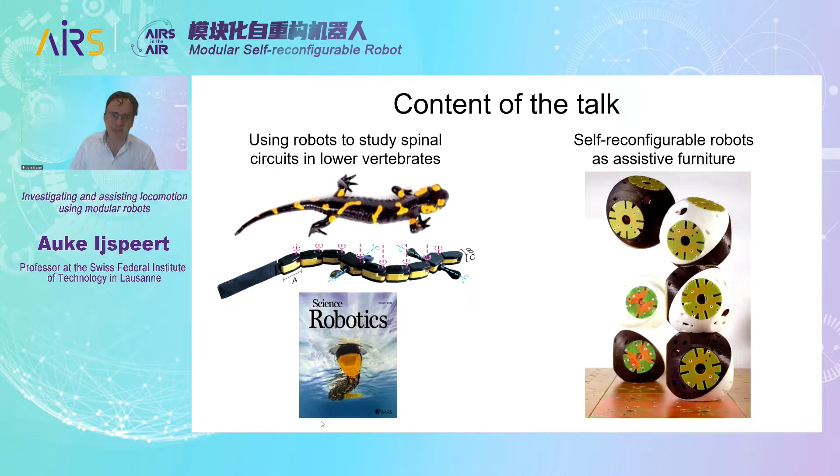My field of research is biorobotics, this very exciting field where people use all kinds of animal-like robots - legged robots, flying robots, or swimming or crawling robots. This is a sub-part of robotics, but super exciting because of these nice interlinks between biology and robotics, which is also there with the concept of self-reconfigurable robotics. It's this intersection between biology and robotics.

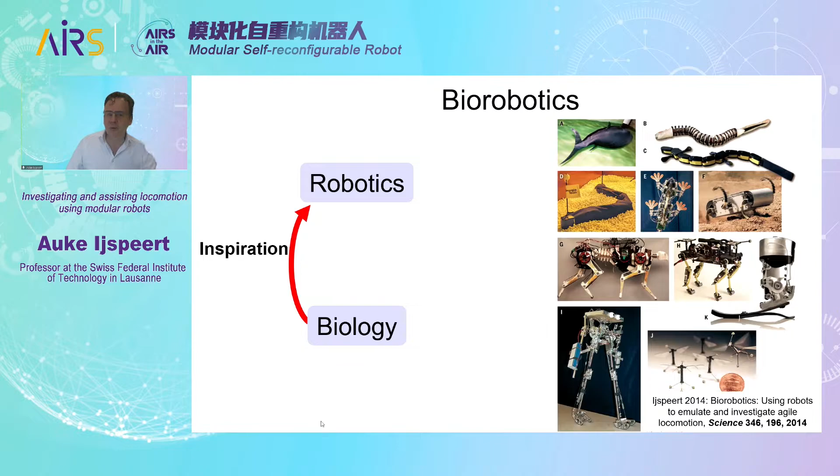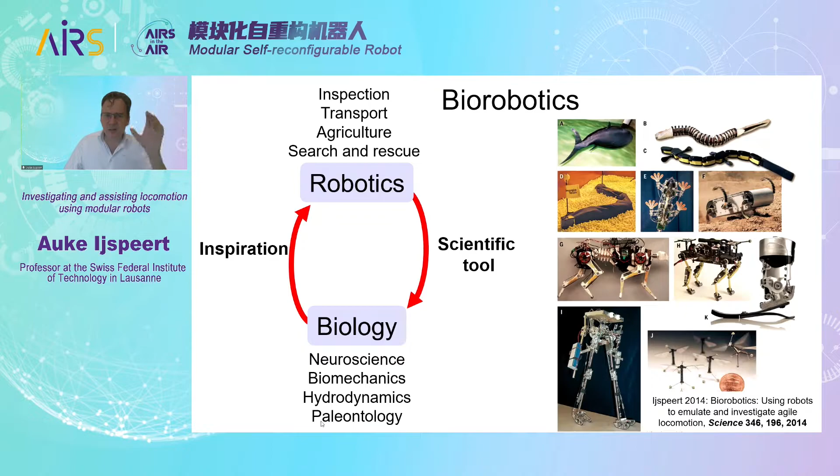One thing I like a lot is this bidirectional interaction between robotics and biology - the fact that you can use biology as a source of inspiration to make robots for outdoors, mainly for inspection, transport, agriculture, or search and rescue. But one thing I like a lot as well is this feedback loop, how a robot can be used as a physical model to test hypotheses about biology. Here on the right, I wrote a review paper that explores all these very nice research projects which have done exactly that. A robot can be an amazing tool to study neuroscience, biomechanics, hydrodynamics, even paleontology. I like this use of robots as a scientific tool.

So the first part of my talk will cover how modular robots can be used to understand and explore questions about neuroscience.

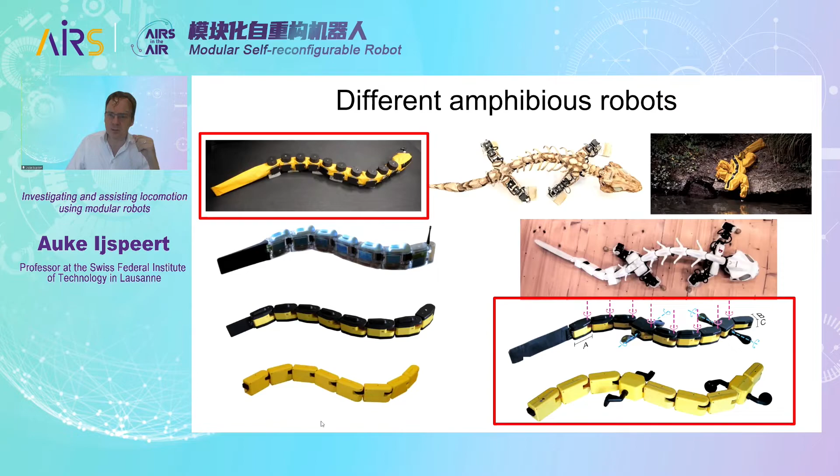To do that in my lab, we have developed over the last 20 years several amphibious-like robots that are indeed very modular. They all usually use the same type of modules or subset of modules, and their interesting part is that they're amphibious, so they can swim and crawl or walk outside. Today I'd like to present Salamandra robotica that we use to study the salamander, and a very new robot, AgnathaX, that we use to study lamprey or eel-like locomotion. So let me start by motivating why we do this.

We are very interested in understanding how the biomechanics together with the nervous system interact to produce this beautiful locomotion. This dog's nervous system is solving a very complex control problem. It has to coordinate more or less 200 muscles in a very good way to not fall. This is a very complex problem because it's highly dimensional, highly nonlinear, and hybrid with changing contacts over time.

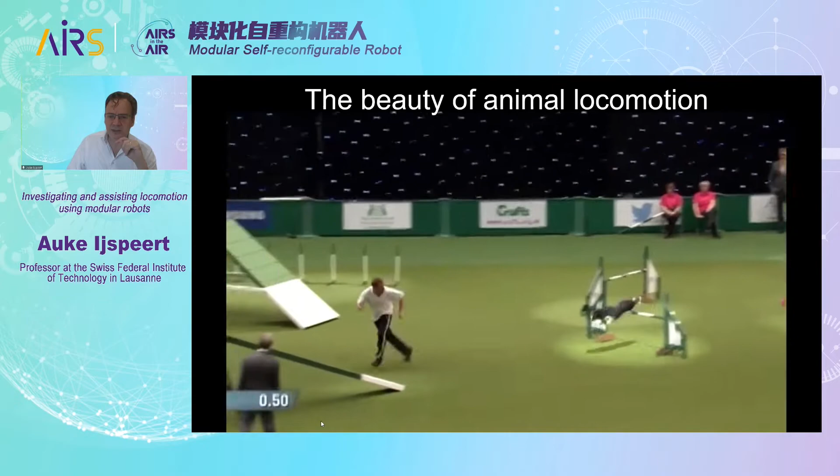And it's impressive how well it does. Animals rarely fall, even we as humans rarely fall. And even more impressively, these agility competitions you may have seen, where dogs have to get scores trying to pass a parkour as fast as possible without mistakes, show how multiple types of sensory inputs from vision and the vestibular system all play together to achieve very high agility. I think in robotics we're making very good progress, and Boston Dynamics is doing amazingly well, but we're still not at this level of agility that animals have, which I find very impressive.

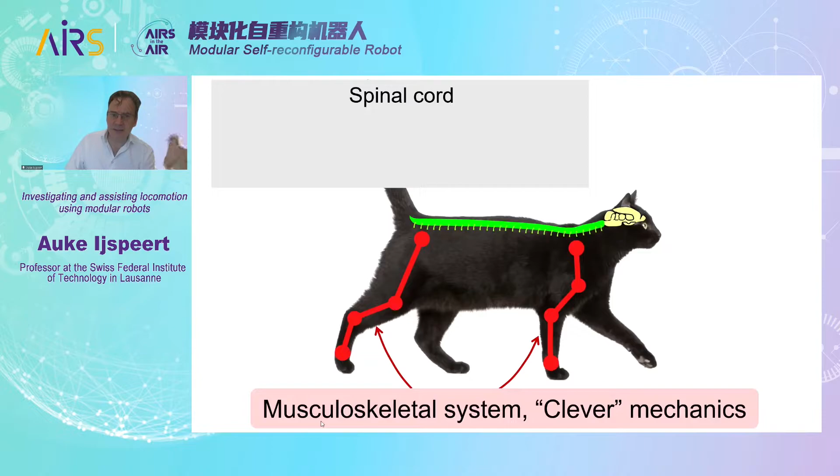Now, at the first level of abstraction, there are I think 4 main ingredients behind this beautiful locomotion. First is the musculoskeletal system. The biomechanics itself is, I think, very well designed to do already locomotion. And then the spinal cord is amazing. The spinal cord in vertebrate animals has, as you know, multiple reflexes - very fast feedback loops to stabilize locomotion.

And also something you might not know, it also has neural oscillators - local populations of neurons that can oscillate, distributed all over the spinal cord to control the different degrees of freedom. I see these central pattern generators, which I will call CPGs, a bit like feed-forward controllers to produce good patterns for locomotion.

A big question we have these days in my lab is to see this beautiful interaction between reflexes and central pattern generators in the spinal cord. One of my goals today is to show a bit how we model them, but also to convince you that these can be very good building blocks for controllers - locomotion controllers for self-reconfigurable robots.

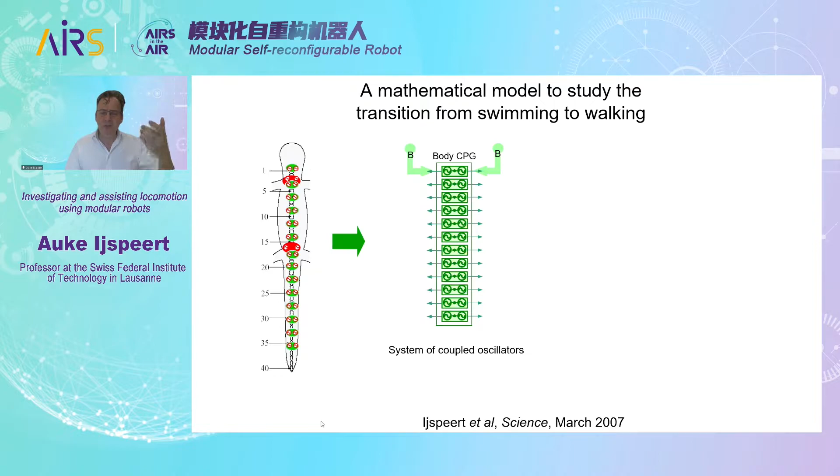With colleagues in neuroscience, for many years we have tried to model these circuits by starting with swimming circuits, as you find in eels or lamprey, and exploring how you should extend this kind of swimming circuits to add walking on top of swimming. We are able to test several control architectures, based on the circuitry of the animal, to explain how the animal could switch from walking to swimming.

Especially fascinating is that in the salamander, if you electrically stimulate the descending pathways at a low level of stimulation, you induce walking. If you stimulate a bit more, the walking frequency increases. And at some point it switches automatically to swimming. So just changing the global stimulation applied to the network makes a global change of locomotion between walking and swimming.

So we made several types of models, but the most abstract models, which are also very good as controllers for robots, are just coupled nonlinear oscillators. With two state variables, one for the phase, one for the amplitude, they are coupled together to produce locomotion patterns. They are very abstract, but still representative models of the neural circuits that we know exist in the real salamander.

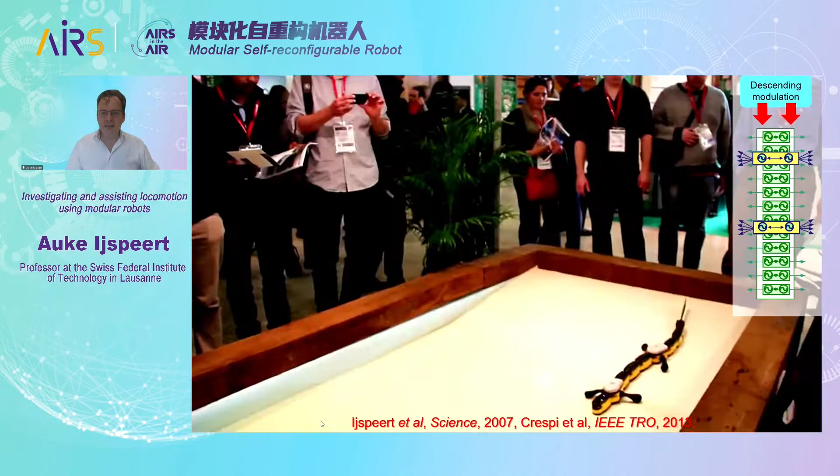Okay, so let's look at how this works on the robot. Let me show you here the swimming and the walking behavior of the animal. What's interesting here is by playing with just two descending signals, the red signals, we can modulate both the speed and the heading and the type of gait.

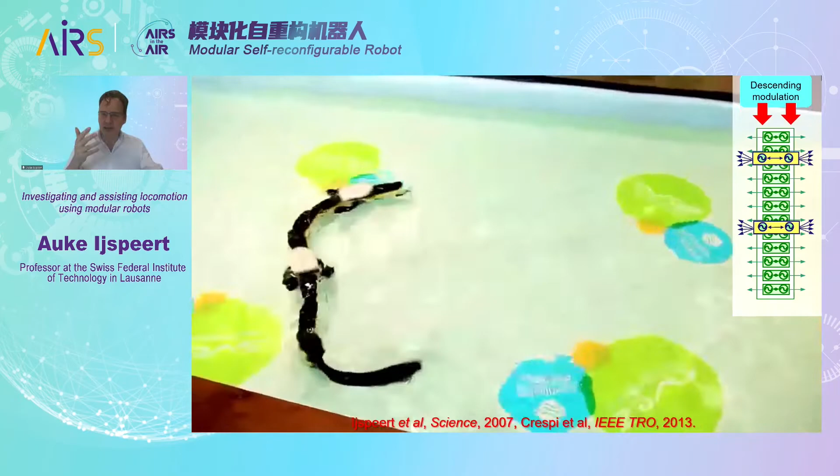If we give a low level of stimulation, as you see here, we have the walking gait. And if we give a high level of stimulation, as we do now with a remote controller, it switches to swimming. And we can even control the direction by just stimulating more one side than the other.

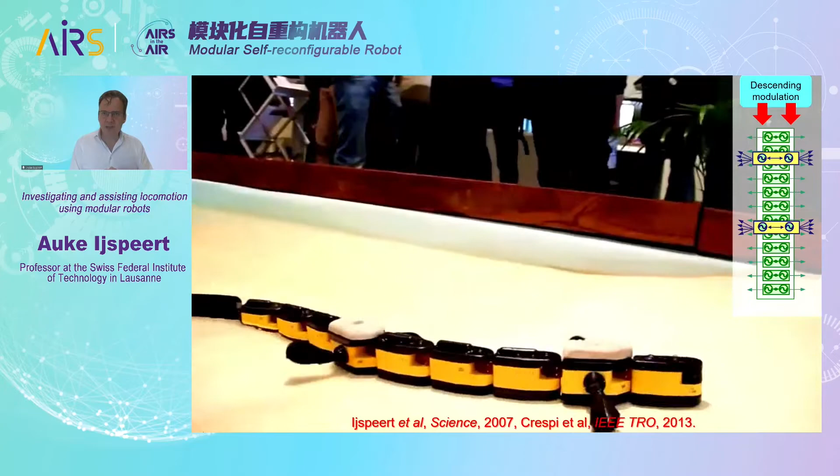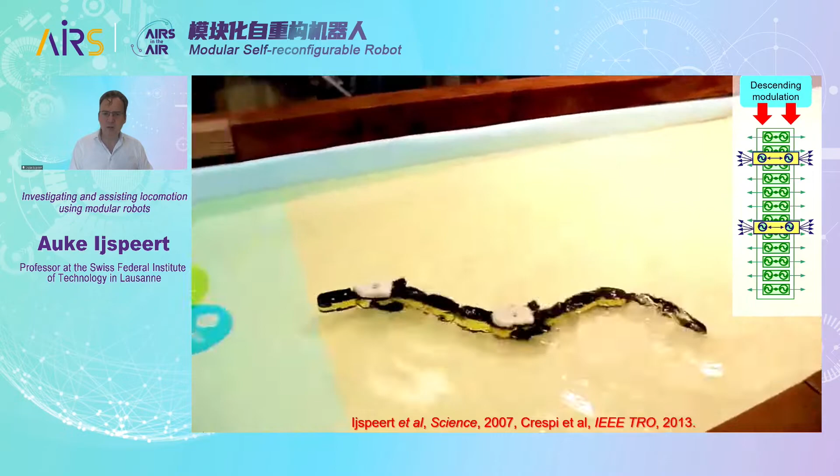I think this is the beauty of the spinal cord: it only needs very simple descending pathways, like these strings on the puppet, and then it's the spinal cord, the CPG in this case, that's completely in charge of modulating all the locomotion signals. I think this is beautiful from a neuroscience point of view. It's also super interesting for robotics, because if you manage to have these low-level, robust locomotion controllers, you can have very good locomotion control based on CPGs.

To summarize, in this case we demonstrated that central pattern generators can modulate speed, heading, and type of gait under the modulation of a very few drive signals.

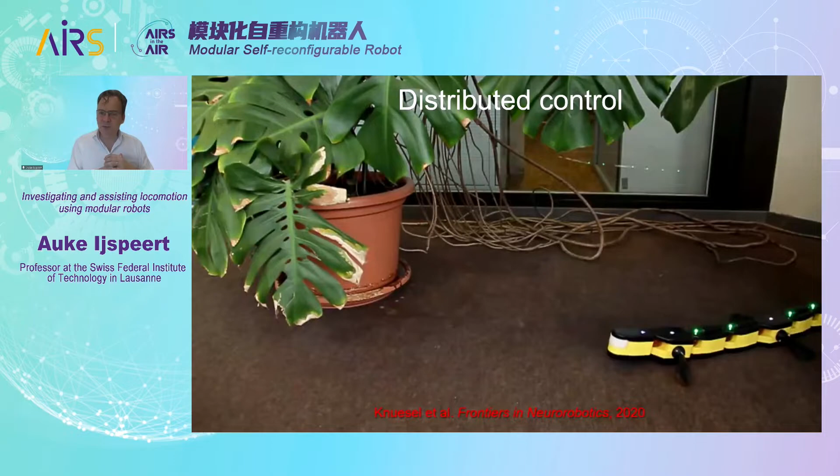Also possibly interesting for reconfigurable robotics: if we just unscrew some connectors here, we can have the robot splitting into different parts, because we are able to really implement these controllers in a distributed way. Every module has a microcontroller, every module has a battery, and they communicate with the CAN bus. But if we separate them, we can still locomote because of this distributed implementation.

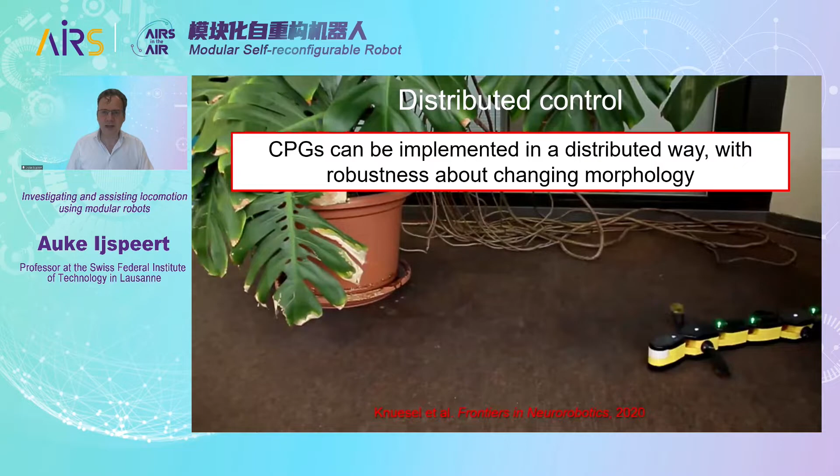Okay, I'll come back to that when I present the Roombots, because we do exactly the same on the Roombots.

Now, a big question in neuroscience is how locomotion is generated in animals. People in neuroscience have proposed two main concepts: one is that locomotion should be seen as a chain of reflexes, where sensory feedback is key to generate rhythms. The other is that locomotion is based on central pattern generators, the oscillators, which is a more feed-forward view of locomotion.

There's a very nice review paper by Art Kuo that systematically explores the optimal way of combining sensory-driven versus CPG-driven locomotion, and he nicely showed that combining them is optimal.

But this is still an old debate that started in neuroscience with Sherrington and Graham Brown. It's also a debate between whether the peripheral nervous system, the sensory signals, or the central nervous system, which has the neural oscillators, is more important. And there's also the question of feedback control versus feed-forward control, which we know is important in robotics.

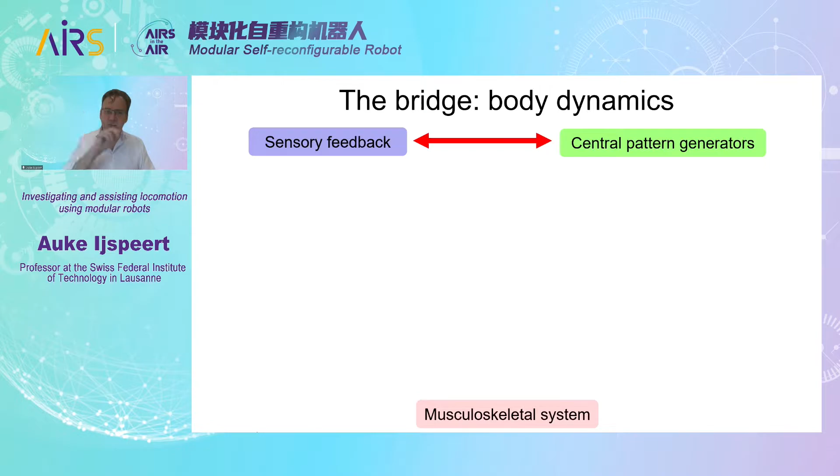So the interaction between sensory feedback and central pattern generators is obviously the body. And here robotics can be very important to show how a well-designed body can do locomotion. The most extreme case of a well-designed body is a passive walker, a mechanical system with no actuator, no sensing, no computation, that can just walk down a ramp with gravity providing energy. That demonstrates that a well-designed body can, in principle, do locomotion.

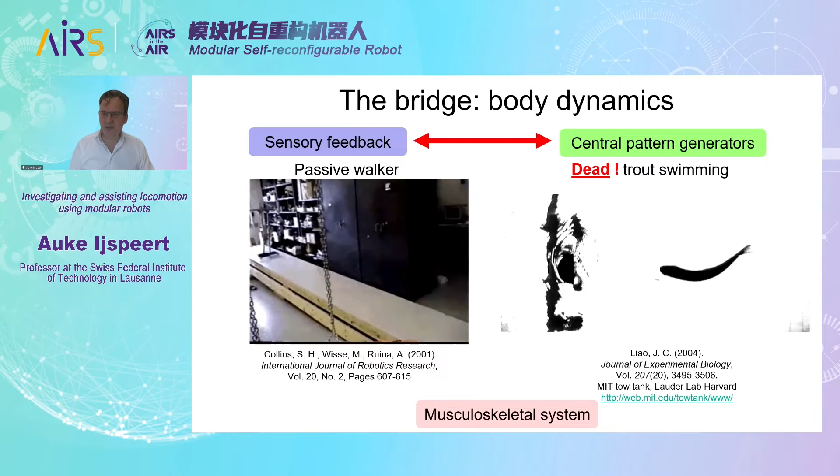In a similar way, fish can swim very well thanks to very good body properties. Here you see a trout swimming in a street of vortices. You don't see the vortices, but there are vortices in the water, and the trout can benefit from this. This is so extreme that in this case it's actually a dead trout—just the biomechanics of a dead fish can benefit from the flow to swim forward, showing it has very interesting viscoelastic properties.

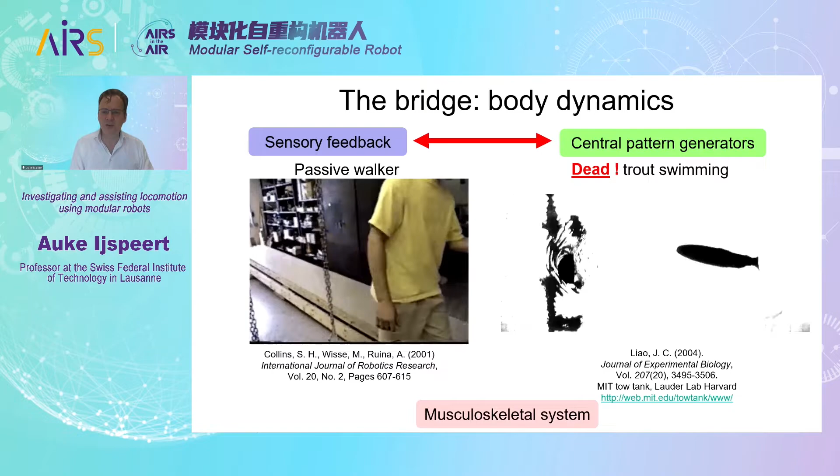Now we very much want to explore how this interaction between sensory feedback and CPGs happens. So we went back to lampreys and eels, because eels are very impressive fish—they are super robust against spinal cord lesion. If you cut the spinal cord in one place or another, removing coupling between the neural oscillators, the eel can still swim almost identically to intact swimming. That means there must be some mechanism below the lesion that keeps the rhythm active and coordinated with the rest of the body, and that must be sensory feedback—sensory driven, since that's the only information available locally, as the descending pathways are completely cut.

So for several years we've looked at the role of sensory feedback in swimming. One thing we immediately knew is that sensory feedback is important to handle perturbations. For instance, with a speed barrier, if there's no sensory feedback—open loop—you are pushed away and cannot cross this perturbation. But in the lamprey, an eel-like fish, we know there are local stretch receptors. If you feed these back into the local circuitry, it acts as a stiffening mechanism that allows crossing the perturbation. So that's the first reason to have sensory feedback: to help handle perturbations.

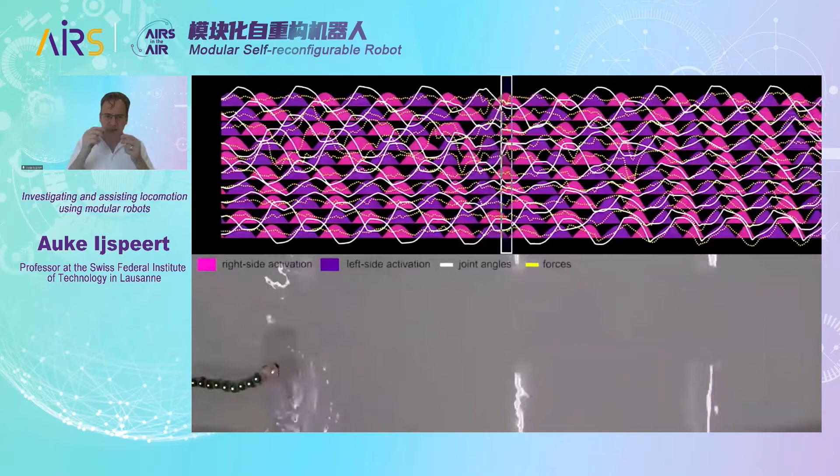And this works also very well on the robot, as you'll see now. It takes a bit more time to stabilize, but here you should imagine all these oscillators start with random initial conditions. They feel the local pressure little by little through the embodiment and through the fluid providing information. You see a beautiful traveling wave emerging. And it's really close to the optimal speed you can have. So it systematically converges to a good forward traveling wave.

And the fact that we go forward, that's asymmetric, is due to the asymmetry of the body. The fact that we have a passive tail at the end breaks the symmetry and makes this swim forward, as you see here.

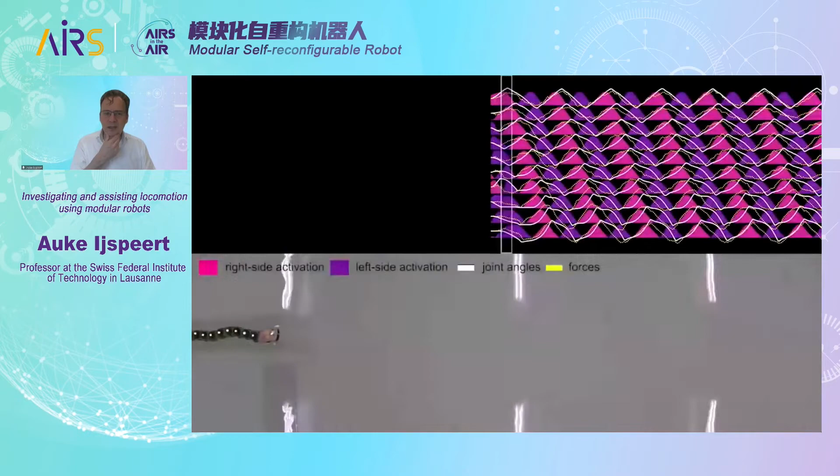Obviously, the animal has everything combined. So if you combine the oscillators and the feedback, you have even better swimming. Here what you'll see is the transients are shorter, and very rapidly now it goes to very nice swimming. So everything together is better than only the oscillators or only the feedback.

And especially what's beautiful is once you are combined, you become very robust against lesions. I don't have time to go in details, so I suggest you read the paper. But what we did is we systematically applied all kinds of perturbations to the network, like destroying sensors, destroying couplings, even killing some oscillators. And we mixed this perturbation with an increasing number of disruptions. And we simply looked at how speed decreases the more you disrupt the system.

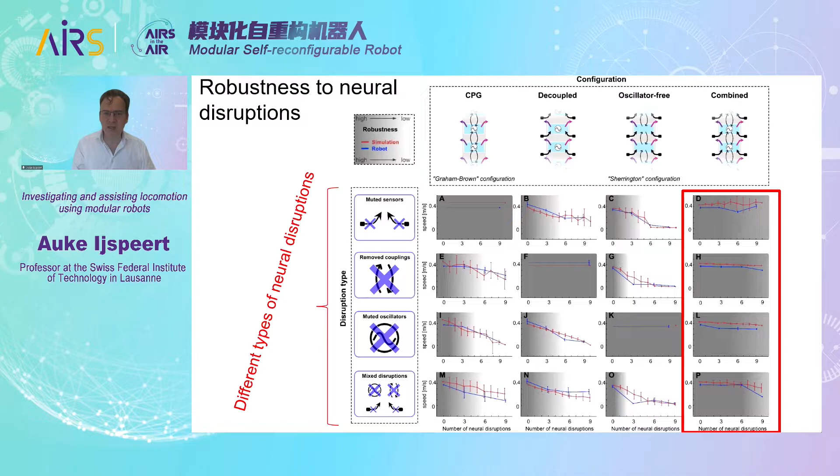And if it's dark gray, it's good. You keep a high speed, but if it's white, you don't have a good speed. And the combined circuit was always systematically much more robust against perturbations than any of the other controllers. So that basically explains why we have these redundant controllers. Each of them separately can do a good job, but together you become much more robust against lesions than any of these mechanisms alone.

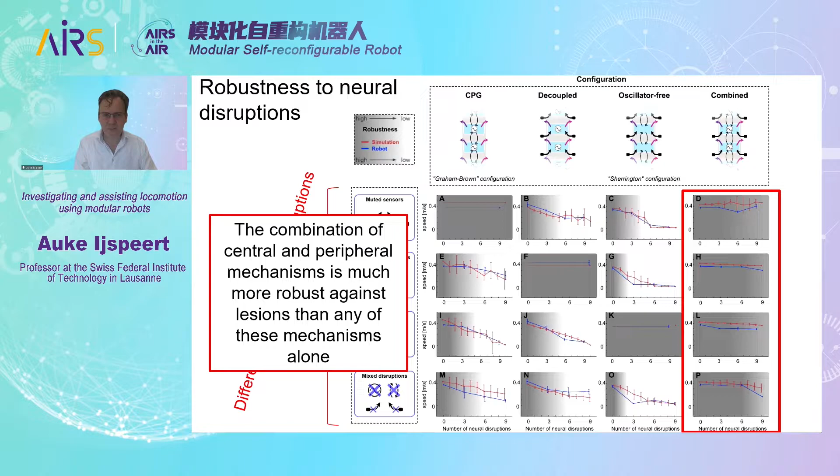That's probably the reason why we have this redundancy in the control system in swimming. Okay, so this concludes the neuroscience part. Basically, my take-home message is the spinal cord offers very sophisticated control circuits and a beautiful inspiration for robotics, with a few descending pathways activating very rich motor behavior. Very good redundancy between CPG-driven locomotion and sensory-driven locomotion, which is, I think, we should always see locomotion as a self-organizing mechanism, very robust.

We have this hypothesis that the respective roles have changed during evolution. And finally, as we'll see next, we really like this concept of CPG-based controllers, or spinal cord-inspired controllers, because it's very robust, it can be implemented in a distributed way, and it's very fault tolerant.

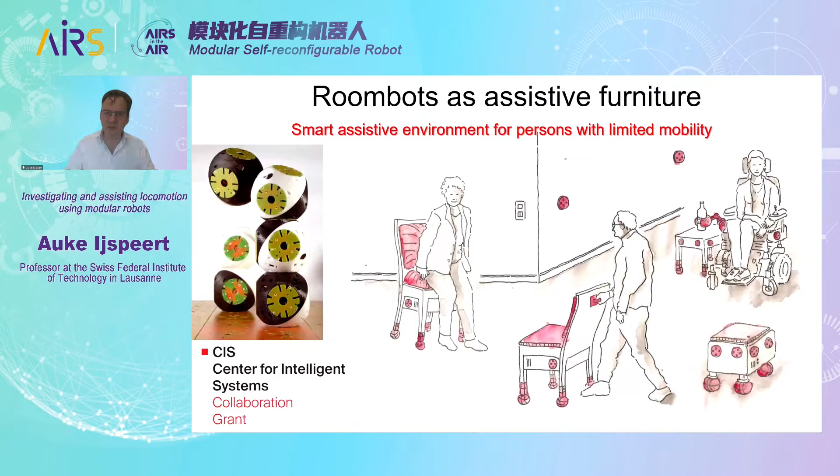Okay, so that's it. Let me now switch rapidly to self-reconfigurable robotics. I see I'm a bit over time, so I'll go a bit faster. But here the idea is to see how the concept of modular robotics can be useful for assisting people with limited mobility. I've been a big fan of self-reconfigurable robots for many years, so I always followed it with big interest.

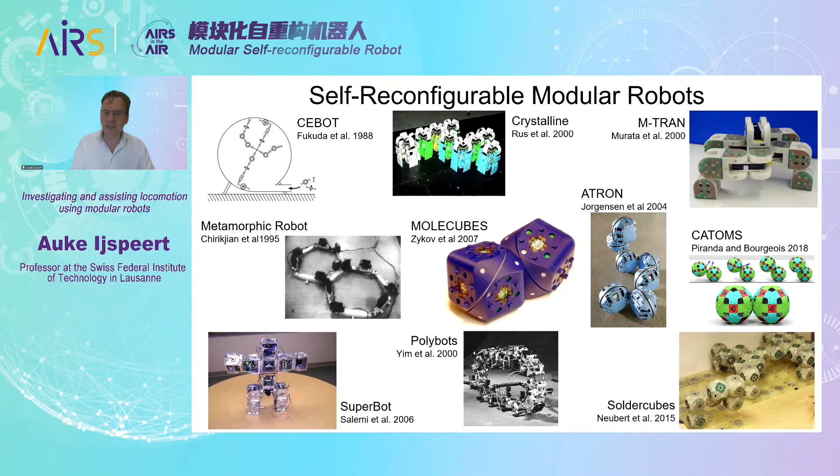We took inspiration from this to make what we call the Roombots, which are self-reconfigurable modules that can attach and detach to the ground. We wanted to see how we can use them for different things, but in particular to create furniture. Because we want to use furniture or the environment to assist people who have lost mobility. That's why we call it Roombots, because they are to be used in rooms and make assistive rooms.

So we wanted to design the Roombots, first of all, as a framework to explore locomotion learning with arbitrary morphologies. We also like the topic of self-reconfiguration. And finally, we want to make something useful - this assistive furniture and assistive environments.

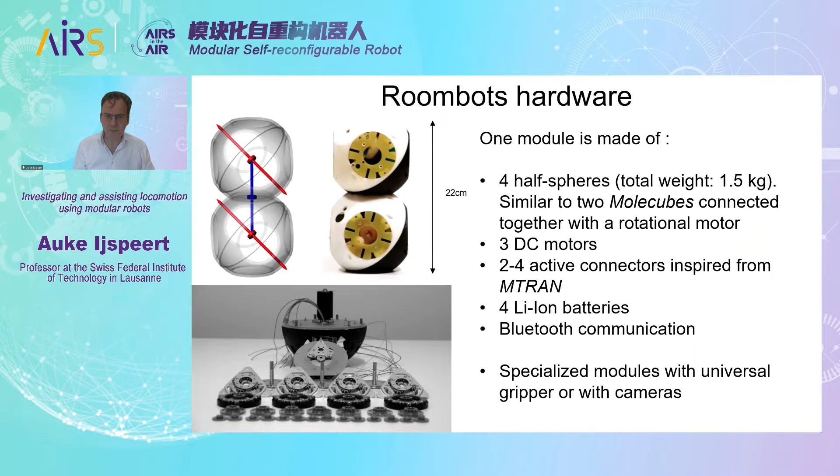The Roombots hardware, this is one module - what you see here is about 22 centimeters, more or less 1.5 kilos heavy. We took strong inspiration from the Molecubes from Zykov and Lipson, but we connected them together and added 1 degree of freedom to allow rotation between the two. We also have connectors inspired by one of the versions of the M-TRAN for connecting things together, and we have distributed electronics, but I'll skip this a bit.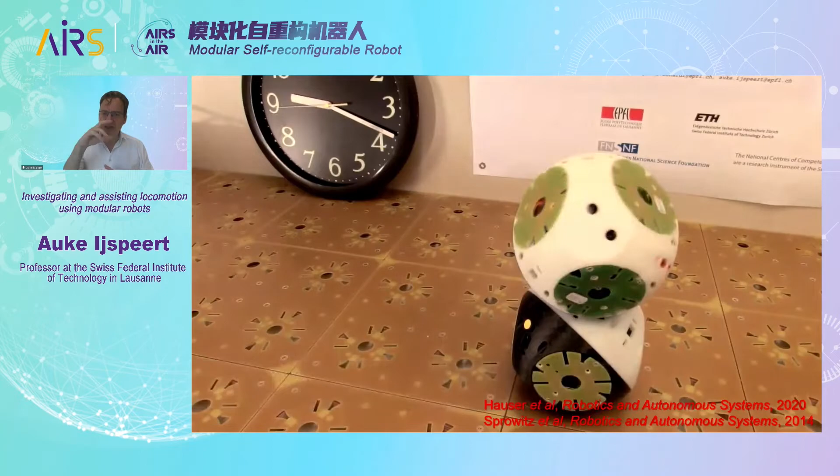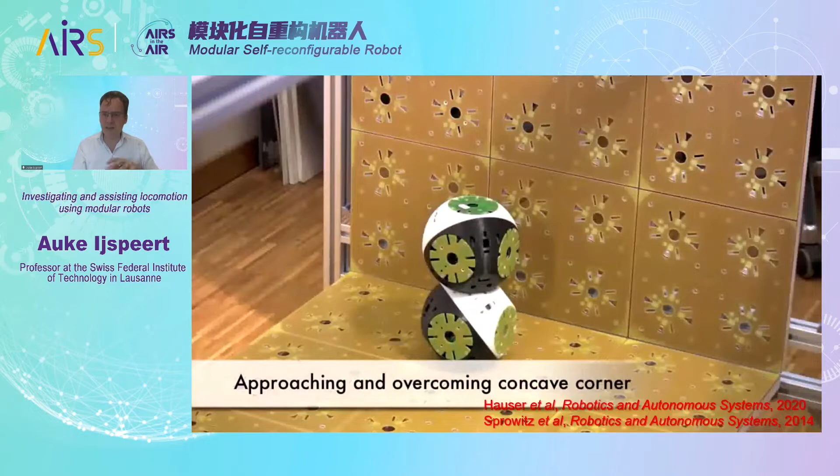Let me show you how this works. This is one Roombots module. You see the 3 degrees of freedom actuated, with diagonal axes of rotation. Thanks to this, we have quite some space of movement we can create between these 4 half spheres. This is the dynamic connector, inspired from one of the M-TRANs. With this, we can connect to the grid, to the ground, and to neighbors. That starts to open all these beautiful options that self-reconfigurable robotics offers - creating building blocks that can move by themselves, that can attach to each other, and that have very interesting properties.

I'm very happy that our modules can do what we call on-grid locomotion. A single module can move around on the floor, on the wall, and even up to the ceiling. That's kind of interesting - if you are in the grid, you don't need others to move around. A single module can have these locomotion abilities.

So what did we do with this? As mentioned, one thing we did is to study locomotion, a bit like animal locomotion. There's a direct link to what I presented on the salamander and the lamprey, in the sense that on the Roombots as well, we can locally program the local oscillators. They communicate via Bluetooth to create coupling, and then we can run an optimization algorithm to find the optimal shape of the parameters of the CPG to produce patterns of locomotion.

We can do that while we locomote, using different types of algorithms. In this case, it's a particle swarm optimization, running on board of the robot. Within half an hour, because the search space isn't that big, we can get very interesting gaits and adapt to different types of morphologies by doing this CPG tuning.

So here I really think that CPGs become very good building blocks, because they naturally produce oscillations, and they're a very good substrate for learning. At the end, interestingly, we got a gait that's quite similar to the salamander gait in this particular case.

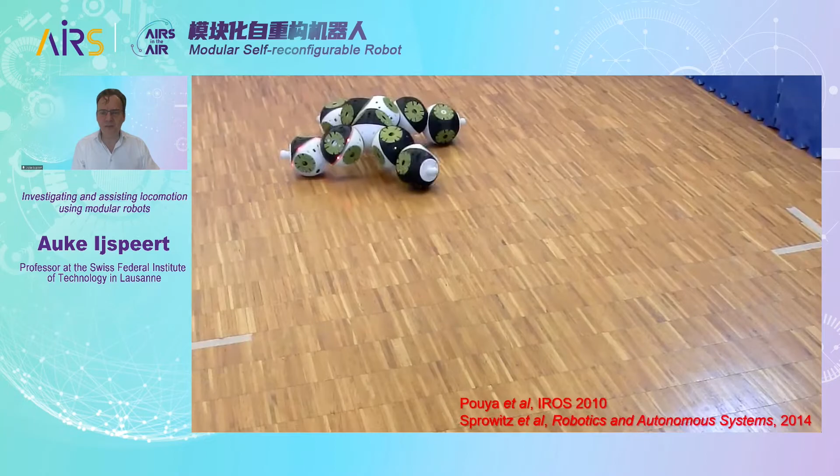Here's an example with real hardware, a slightly different morphology, where we learned this online, and you see that you also get interesting gaits moving with the real hardware.

And here I like the notion of using optimization to explore the space of gaits, because you might generate gaits that you would not design as an engineer. Like some of these rotations go beyond 360 degrees and makes a fun way of moving around with the hardware.

So that's what I call off-grid locomotion, when you do locomotion completely outside the grid of connections. Now we also want to do on-grid locomotion with self-reconfiguration.

And here, as you know, and other people are more expert than we are, but this is a very challenging task, because this is now really exploring a tree of possible options. You have this curse of dimensionality, the explosion of possible options. And it's a very big problem how to get 20 modules go from configuration A to configuration B.

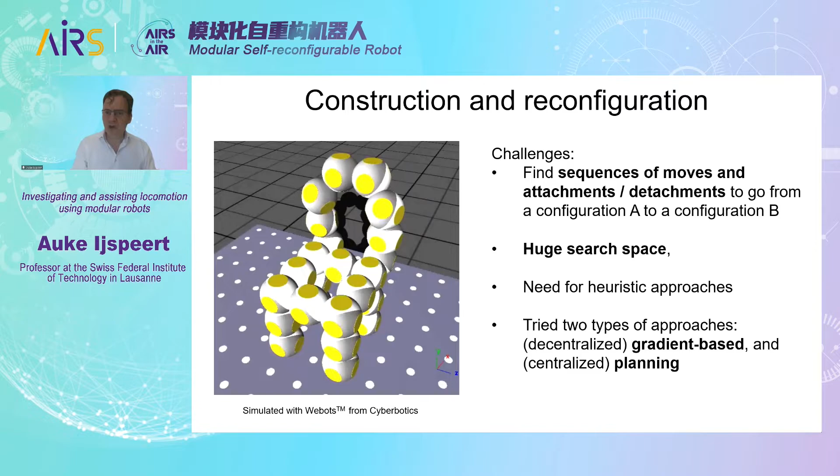And we do it in different ways, either in a decentralized way with gradient-based, but that can get stuck in local optima. Or with fewer modules, we can do it in a centralized way with more traditional planning. And I'll briefly explain this planning here.

So the idea is to reduce a bit the space of all possible movements to discrete actions with discrete angles. And then to really think into voxel, like a 3D voxel space. We don't allow any type of configuration. We stay in a voxel space to reduce the options of structures, but still with a very large range of things we can do.

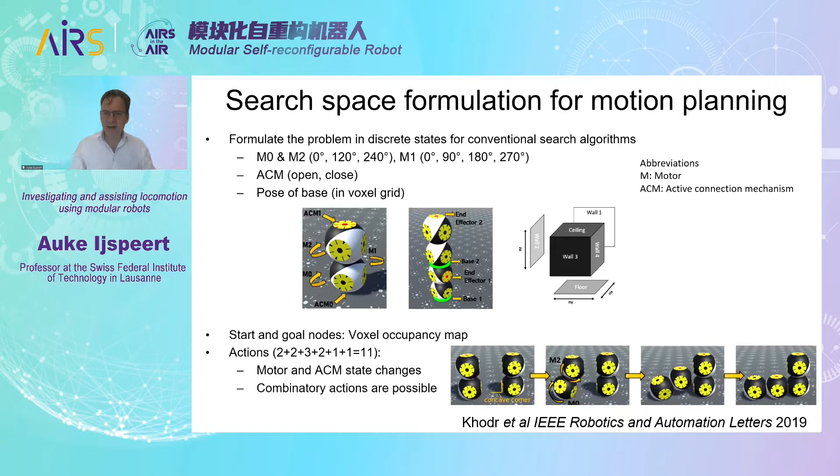Then, of course, to search faster, we need some tricks. When we have the tree of possible options, we prune the tree to remove things that are not interesting, like things that have collisions, things that try to break a kinematic chain, things that don't lead to a meaningful connection, or things that even lead to modules that would drop. So we prune this out.

But doing that, we can now do nice on-grid locomotion where we can, for instance, ask this module automatically by itself to find a way to cross this little barrier. So the search algorithm will find an optimal way of moving from here to the other place.

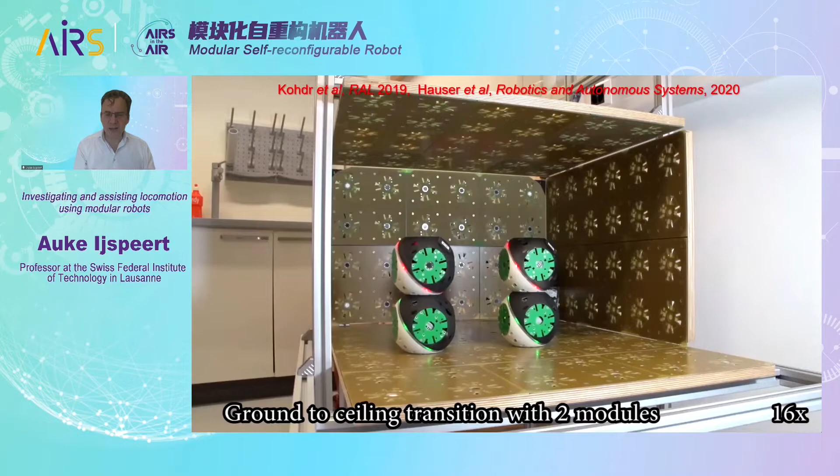Also, what's interesting is if you ask both modules to go to the ceiling, the search algorithm will discover that it's good to collaborate. Rather than each of them moving around the walls, it's a good idea to collaborate and help each other to go up there. And that's automatically found by the optimization algorithm.

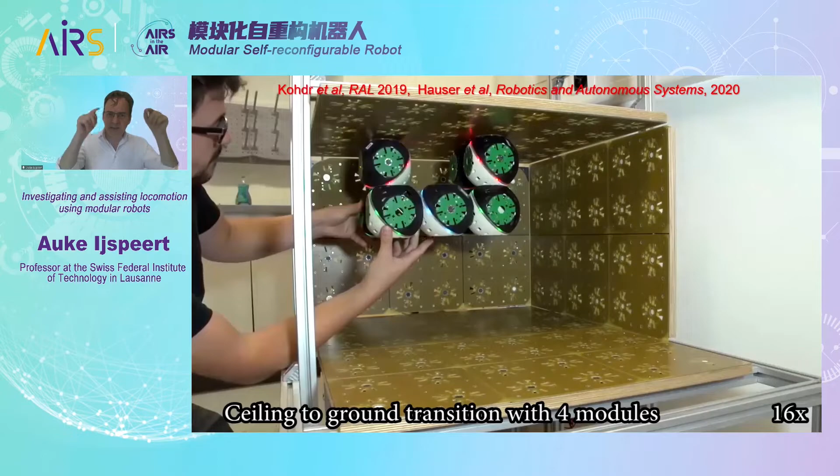Similar thing, if you ask the modules to go down, they will also discover that the fastest way of doing that is to collaborate, help each other. And then you can go down to a new configuration to the ground. So these are all things that emerge from the search space and the A-star algorithm that we use.

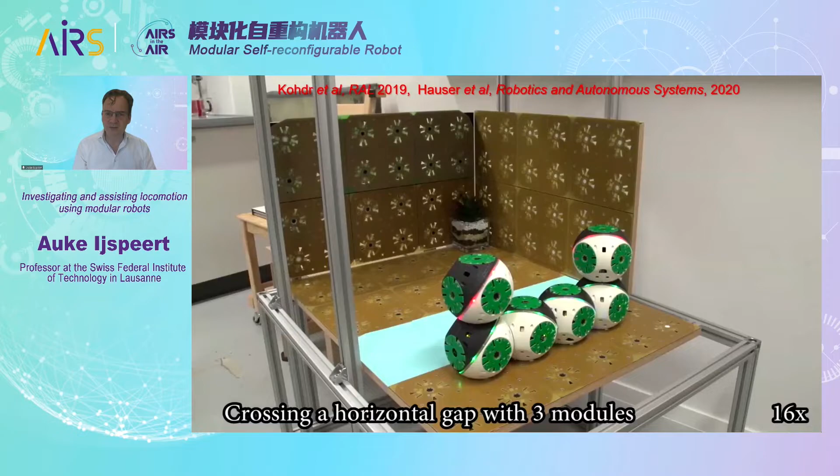And at the end here, this is an example where we have to cross a gap. And here you find also a bit like social insects that construct a bridge, like these ants that construct a bridge. The algorithm is finding a way of doing that.

Now, the most complex thing we did is to construct a chair automatically. We did it in 2 stages, so we had a mid configuration and then an end configuration. Otherwise, the search space was taking too long. But here you basically have we found a sequence to automatically construct a chair. So sometimes we have to help it a bit. By the way, the connector is not perfect, but this is a way of self-constructing furniture.

On my side, I love to construct my own furniture. I'm a fan of IKEA, but if you're lazy, you could just press a button and the furniture would construct itself. Now, very rapidly, because I'm close to ending, I think two more minutes.

Now I want to say how we start exploring the use of these modules for assistive furniture. And here the idea is to, little by little, embed help in the furniture or in the environment for people who have lost mobility. Like if you're in a wheelchair, it could be interesting to have the table bring something to you rather than having you go to a glass of water, for instance.

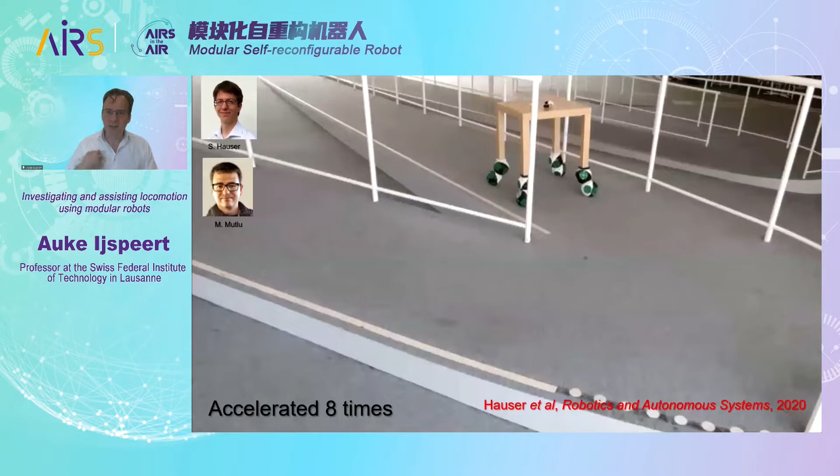And here what's interesting is that we can connect our Roombots module to existing furniture. So this is an IKEA table to which we give mobility, as you see here.

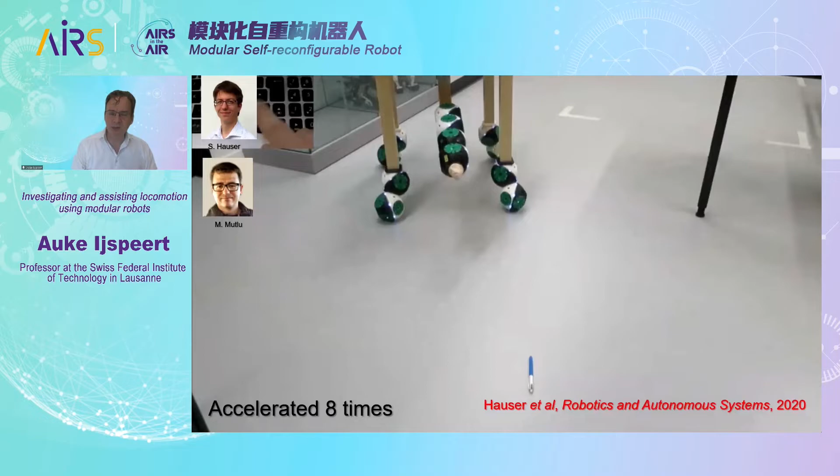And it can move, it's remote control, but it can adapt to slopes, it can adapt to steps. And it starts, therefore, to give interesting functionalities to a table. We also have a universal gripper. So now a table could bring a pen to somebody who is in a wheelchair, as opposed to having the person come and go towards it. And it can also do simple manipulation abilities from one to the other using the universal gripper.

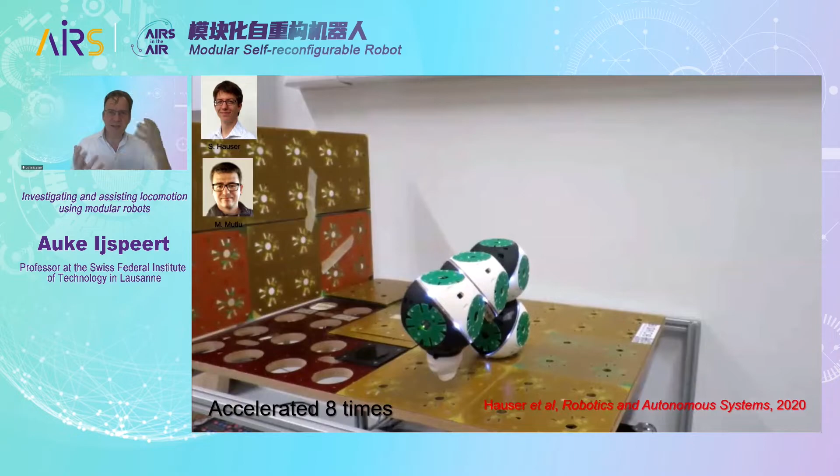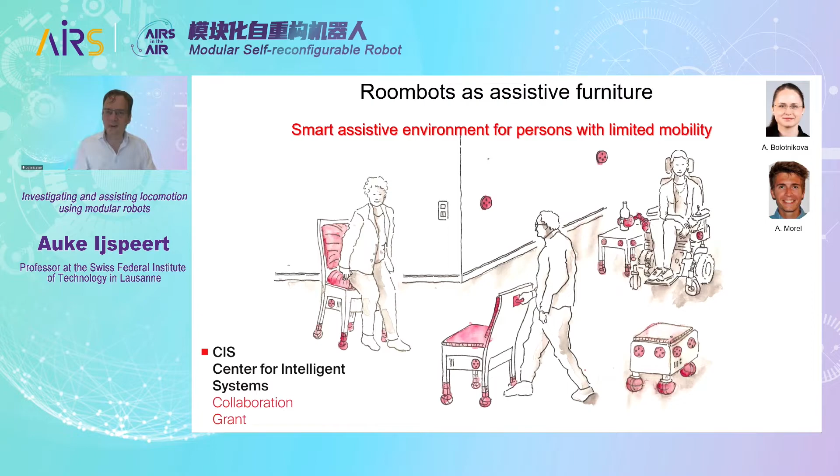So this is a bit the dream, to start exploring how we could embed all this technology in the environment, and indeed make sure that the furniture is there to help move out of the way when you cross the apartment in a wheelchair, and then comes back to help you, or also give stability for elderly. And then finally, I really want this to be fun technology, something that's not only interesting for assistance, but just fun to have functionalities and even to play games with kids. So that's a bit the dream for the Roombots.

And finally, I think the Roombots could also be applied to reconfigurable factories or conference rooms, or even in space, possibly. That could be alternative applications of the Roombots.

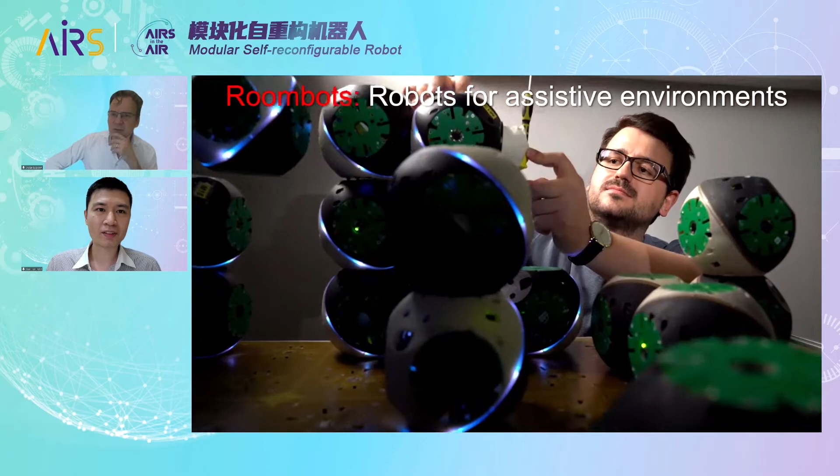Yeah, I think that's important. Actually, if you only use modular robots to build a chair or table, it's very difficult to make it useful, because it may not be rigid enough to hold something.

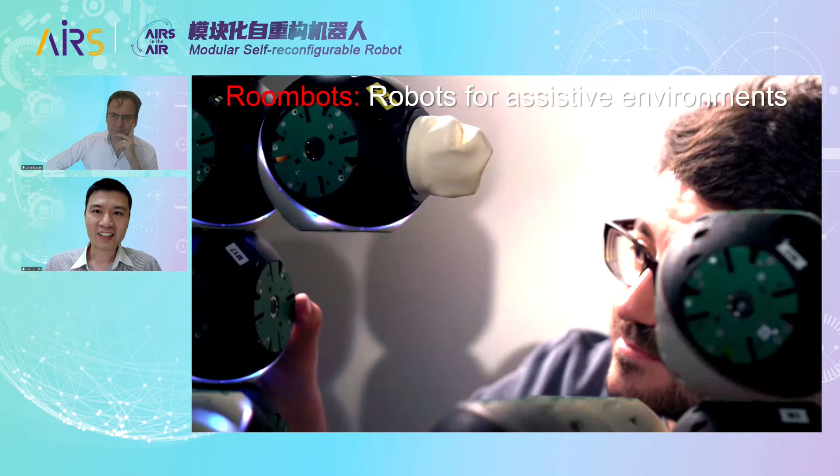Yeah. Okay, so it's time to have some questions. Is there any questions?

Hi, Professor. Thanks for your wonderful talk, which is very inspiring. And I'd like to ask a question. I think the working model of CPG does not look very complicated, but it is. I think it's very effective. And could you please explain the reason why, from a biological point of view?

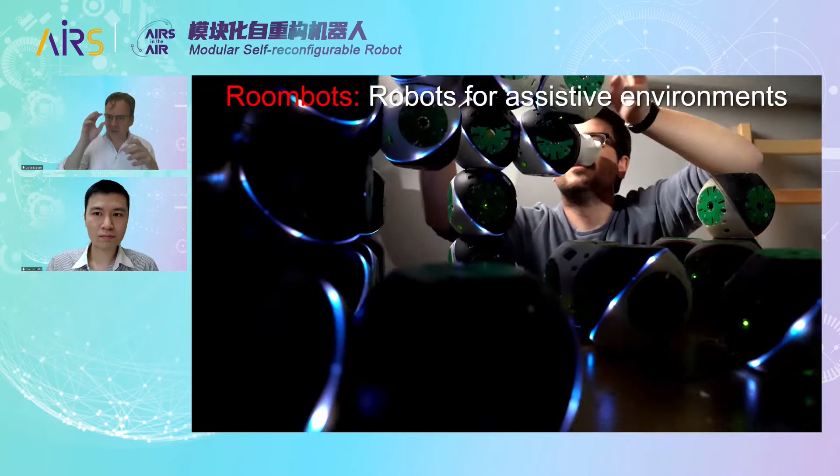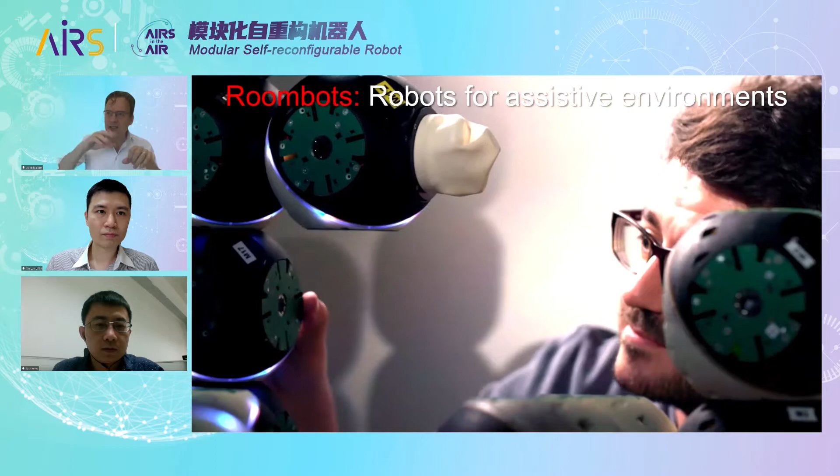Yes, so I think nature has evolved these oscillators as building blocks, and these are very good basis for locomotion. So indeed, once you have the oscillators, the main thing you then need to adjust to get locomotion is to adjust the coupling such that you have the right phase lag. For instance, sometimes you want anti-phase behavior, sometimes in-phase behavior. And then the phase lag is important, then the amplitude is important, and possibly the waveform, what exactly you're doing with the joints. But having these as building blocks, it's kind of normal that the learning then goes quite rapidly because you already have very good basis for doing locomotion. And I think both during learning and during development for different morphologies, that's what nature has done. It's just reorganized a bit these blocks, these very useful building blocks for behavior.

Okay, yeah, thanks, Prof. Yeah, thanks for the good question. Yeah.

All right, we have a question in the chat box. Hi Professor, I'm a freshman. I'd like to know which major's knowledge do you think is the most important? I think it means what's the important knowledge to make a modular robot or to generate central patterns, or also which educational program to follow possibly.

Yeah, I think that's a very good question because indeed I'm lucky that in the team we have people with very different backgrounds. Some are more computer science, which is very important for good software engineering, programming, and machine learning. Some are more control people, some are more mechanical, and some are from electronic background. So I think to make a good modular robot, self-reconfigurable robots, you need to mix all these skills. Interestingly, I was a physicist, so I was never trained as a roboticist. I became a roboticist later, so even if you don't do robotics, there's still hope for you to do robotics later.

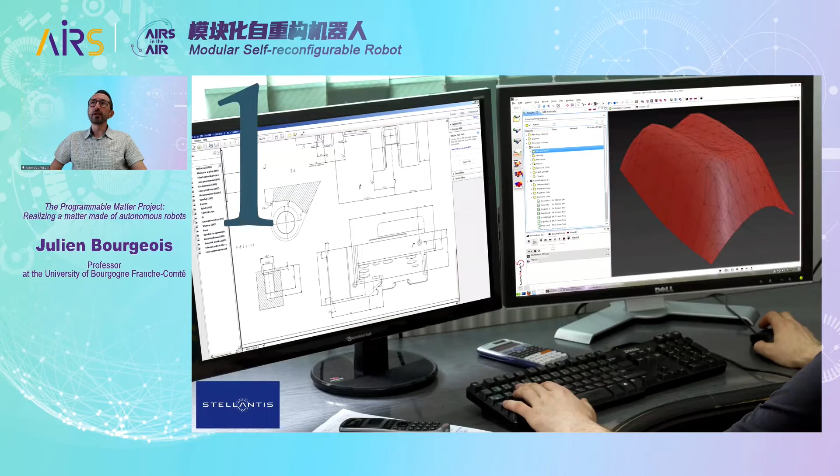Okay, so what could be the applications of such a small robot? We envision four potential applications. The first one is in collaboration with the car manufacturer Stellantis, to enable an easier way to design parts. You can see here that an engineer has done a rear view design. It can be transmitted directly into programmable matter, and designers can work by hand on this matter, removing some parts or adding others, modifying the design, which can be updated in real time in the CAD tool, and which could perform all the resistance calculations, for example, or molding process, etc.

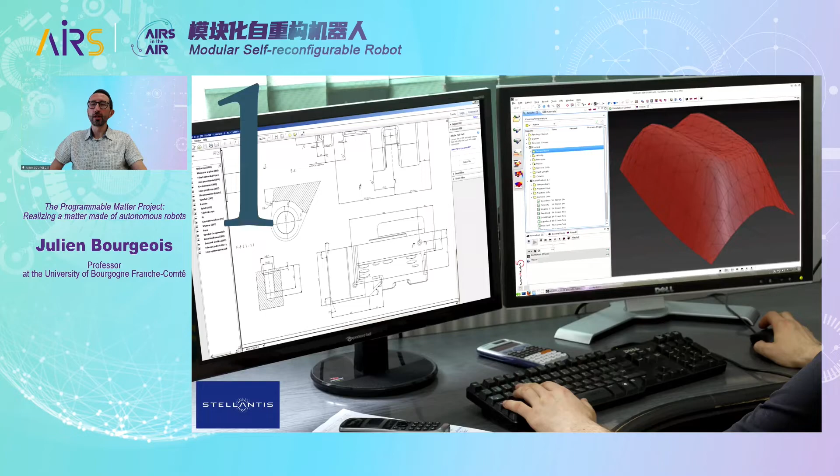So the second one deals with interfaces. You all know graphical interfaces, which are very practical because you can display whatever you want, but the problem is that you have to look at the interface to control it. On the other way, you have tangible interfaces, which allow eye-free contact interaction, but they are not very modular. Most of these interfaces are encountered in the professional world, either for sound, camera, or for cockpits of airplanes, for example. What we would like to do is a human-computer interface using programmable matter, which would allow eye-free usage with a real interface, but also which would be reconfigurable and allow user-defined interfaces.

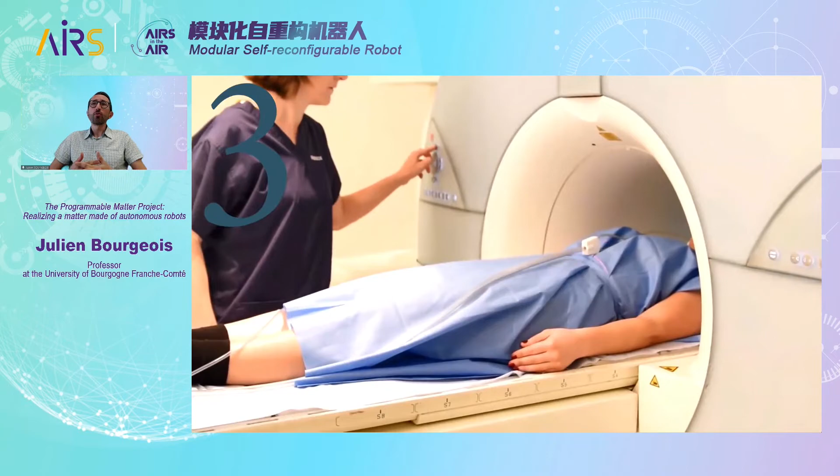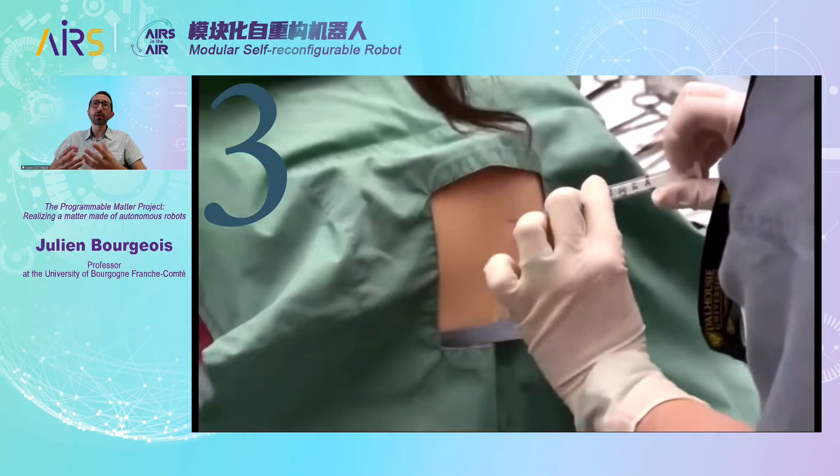The third example: imagine you are a surgeon with a complex surgery to do. You take an MRI of the patient, which creates 3D images, and you can then test for real, using real matter, using programmable matter.

It can also be used for students. And the last example is in space. You have restricted space and weight, so having tools that can be reconfigured would be a good solution. For example, you don't have the same tools when you are outside or inside the shuttle.

To do this, we have built a consortium which comprises research labs and universities in computer science, MEMS design, electrical engineering, mechanical engineering, art, and also industrial partners, both in France and in the US, comprising approximately 40 persons working on the project, either permanent or non-permanent staff.

So let's begin with the hardware design of the robot. The project started in 2006 at Carnegie Mellon University using a meter-size helium balloon with electrostatic actuation. Then they went to decimeter, centimeter, eventually millimeter.

For now, we are trying to build the next generation, moving in 3D and also being fully autonomous, because this robot wasn't able to compute, for example. We now have all the parts produced, and we are working on assembling all these elements.

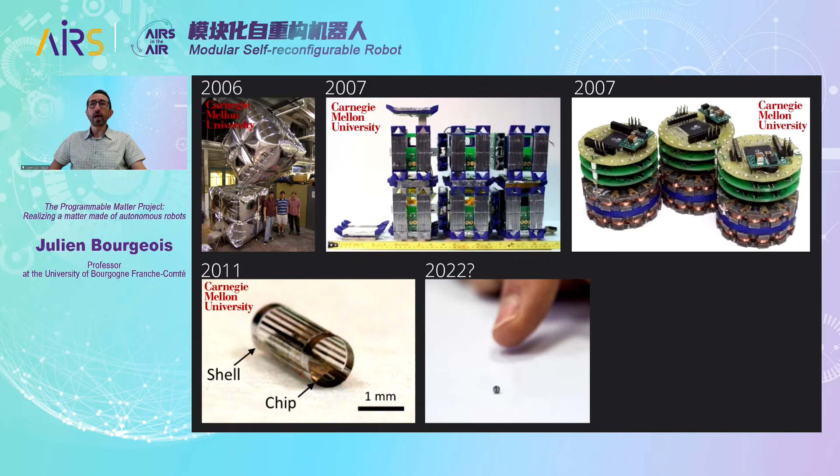And in the future, as Auke was talking about hardness versus softness of the robots, we are trying to see if we can bridge the gap between both worlds, making an element that is both deformable and hard when it stands.

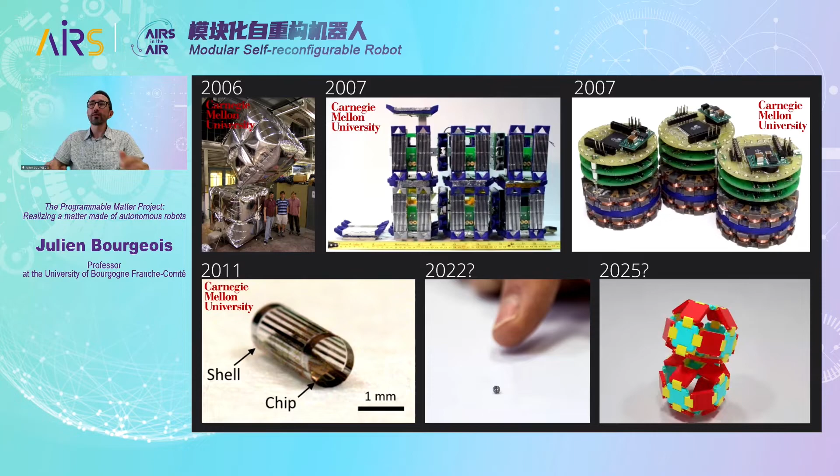So let's talk a bit about the geometry of the robot. We have first placed 12 connectors that you can see in red. When you draw a line between these connectors, it creates a truncated cuboctahedron.

But this shape is not very good for moving, so we put some parts of cylinders between these red electrodes, and it creates a new kind of geometrical structure, which we call a catom, for Claytronics atom.

They are placed in an FCC lattice, and they can move using two kinds of actuators, either the green one or the blue one.

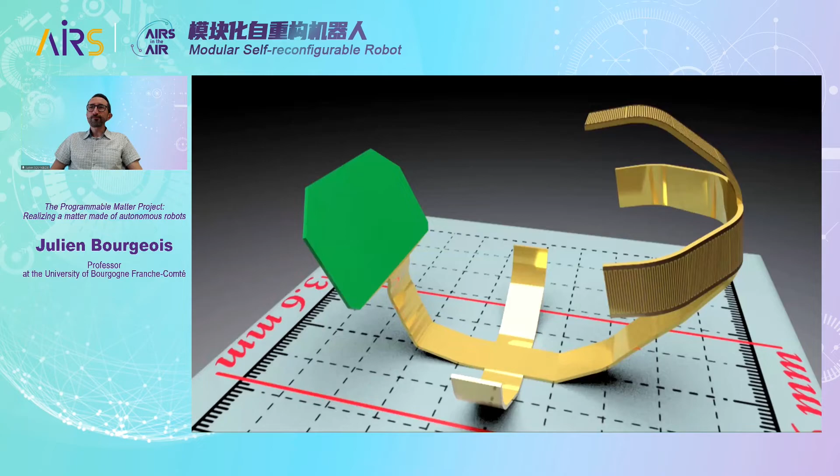So now, what is the structure of the robot and how do we plan to make it? First of all, we have the electrodes, which are composed of a parallel flexible element that can conduct electricity, and we are using electrostatic forces.

So these elements are the following: first we have the shell, you can see half of the shell here. It's a rigid element. Inside the shell, we placed the electrodes, part of the electrodes, and a computing unit of the M-cube.

It's a complete computer with a battery and a voltage upscaler. For the computing unit, we use a Cortex M0. Then we had the second part of the shell, and we close everything.

The shells are 3D printed using a high precision printer called a Nanoscribe. We add the electrodes that we call the flexiboard. You can see that we have structured on the electrodes some metal plates that are used to stick between two catoms.

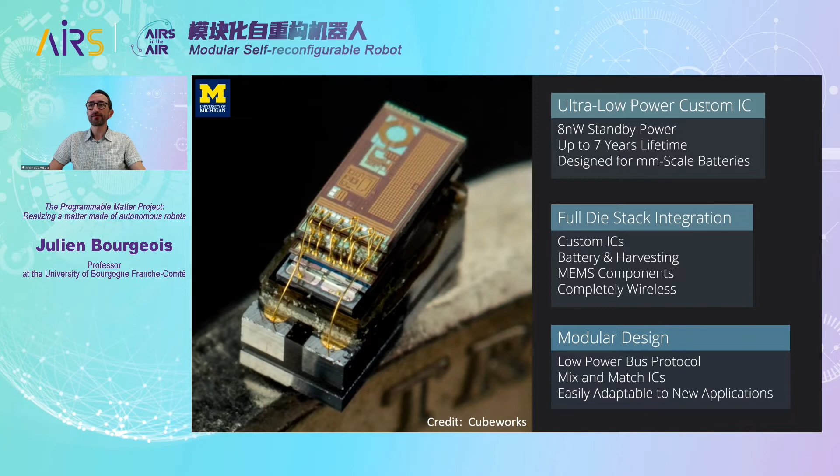Regarding power, because it's really one of the main issues, we have spent the last 2 years designing the high voltage generator. Why? Because electrostatic actuators use 100 volts at least to operate. The problem with conventional driving circuits is that they use individual charge pumps, Dickson charge pumps to be precise, which use a large area, and when you charge one you lose a lot of power. To replace this, we used one ramp of charging pumps, and below this ramp a high voltage multiplexer, which allows us to charge all the charging pumps only once, and then select the correct power we'd like to transmit.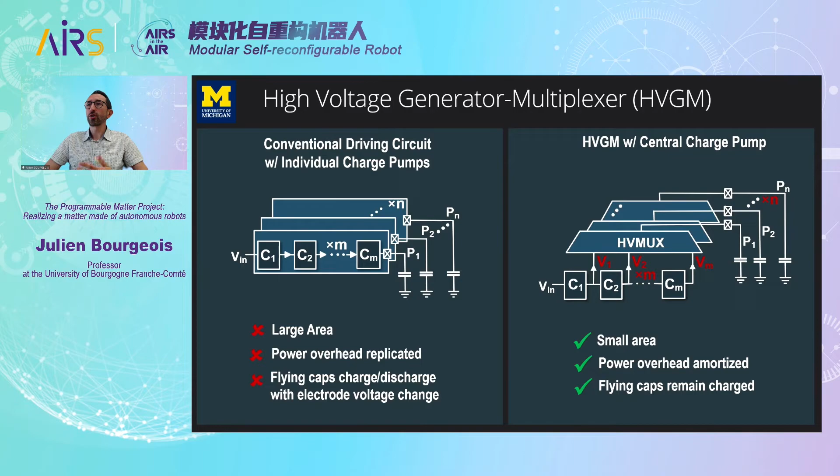The two nice features of this circuit are that we are able to generate 120 volts with very low power consumption, around 300 nanowatts to charge all the charging pumps. After that, the consumption is very low because electrostatic actuators use almost no charges.

So let's see now the actuation. We made some experiments to see if the shape was able to roll with external actuation, and it works. Now we have to perform experiments with the real robots once they are integrated. That's what we are working on currently.

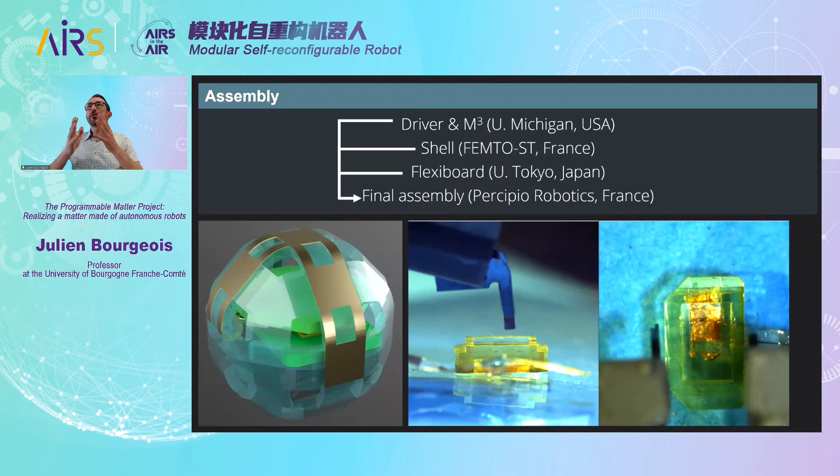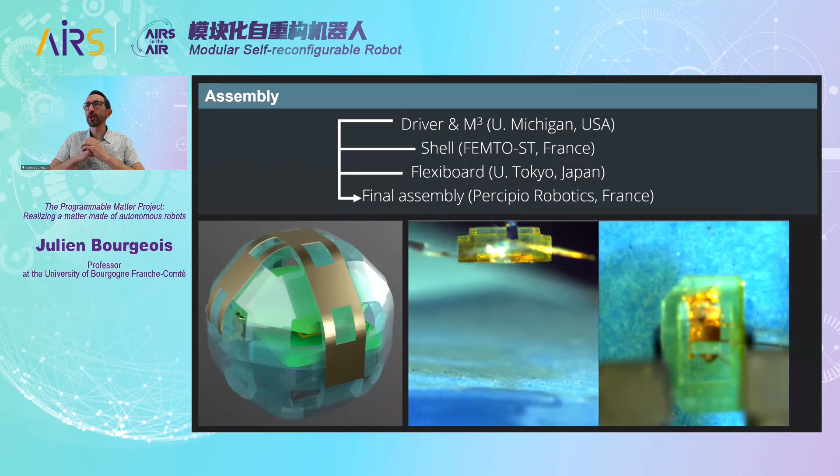The driver and the M-Cube are coming from University of Michigan, the shell from France, the flexiboard from University of Tokyo, and the final assembly takes place in France in a spin-off of our lab called Percipio Robotics, because we need to have a robot that is building the robot.

So you can see here the first experiments of assembly of the robot, and now we are working on an automated system to do this.

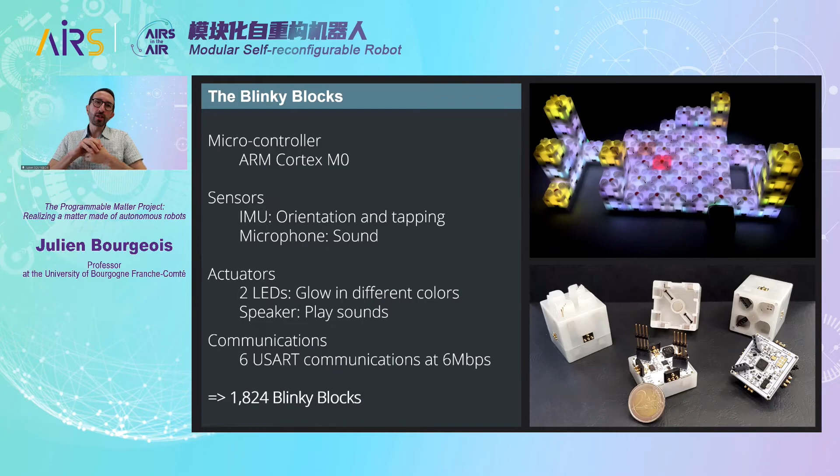Meanwhile, we have also designed other kinds of robotic structures, simpler ones, so that we can teach with them using the same processing unit, ARM Cortex M0, and the same characteristics. Communication is possible only with your neighbors. The difference is the actuation: they are not moving, but they can glow in different colors, play sound, and communicate with their neighbors. And we have 1824 Blinky Blocks.

Now let's switch to the software part. First I will begin with a presentation of our simulator called VisibleSim. VisibleSim is an open-source behavioral simulator for lattice-based modular robots executing distributed algorithms. It is developed by FEMTO-ST Institute. It performs a deterministic simulation of systems composed of similar robots in different flavors of 2D or 3D lattices. VisibleSim is used by many roboticists and computer science researchers and is available on GitHub.

Several kinds of robots can be simulated, and VisibleSim is designed to easily add new robotic architectures. Smart Blocks move in a 2D square lattice, sliding along each other, whereas Hexanodes turn around a neighbor in a 2D horizontal hexagonal lattice, and 2D Catoms in a 2D vertical hexagonal lattice.

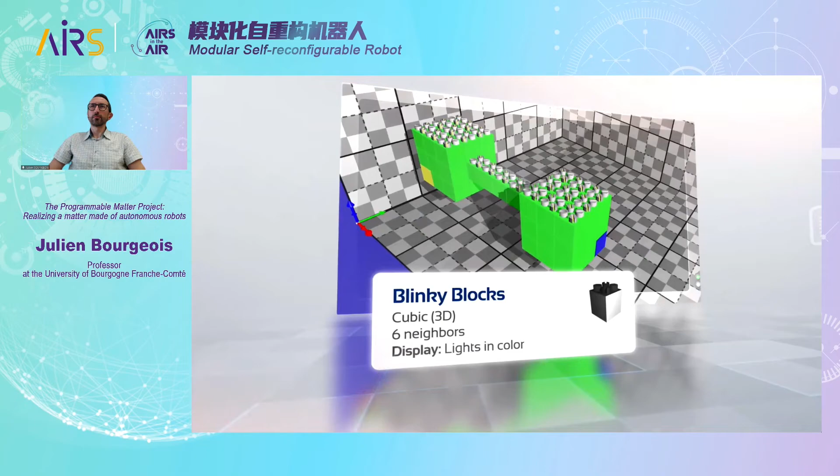Blinky Blocks are a bit different, as they do not move but can glow in different colors. Real hardware Blinky Blocks have been fabricated and are fully operational. Simulations made in VisibleSim have been compared to executions on real hardware and have shown the high precision of VisibleSim for distributed algorithms, synchronization time, and mechanical resistance evaluation.

3D Catoms and Datoms are our latest hardware development. They operate within the same lattice, but their modes of movement differ.

To test the performance of VisibleSim, we designed a stress test experiment consisting of simulating a sort of concurrent Brownian motion over as many modules as possible within a square grid. At the start, a single leader module activates and sends an activation message to all its neighbors. Upon reception of this activation message, modules turn into the activated state.

Activated modules then alternate between a 0.5 second wait and a random motion lasting 1 second. When a motion ends, the moving module sends an activation message to its new neighbors, if any, before starting the next wait-move cycle. The simulation ends when all modules are in the activated state.

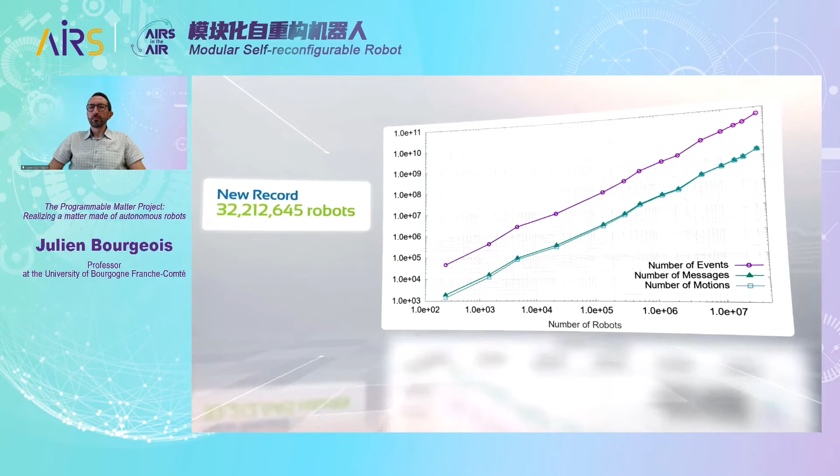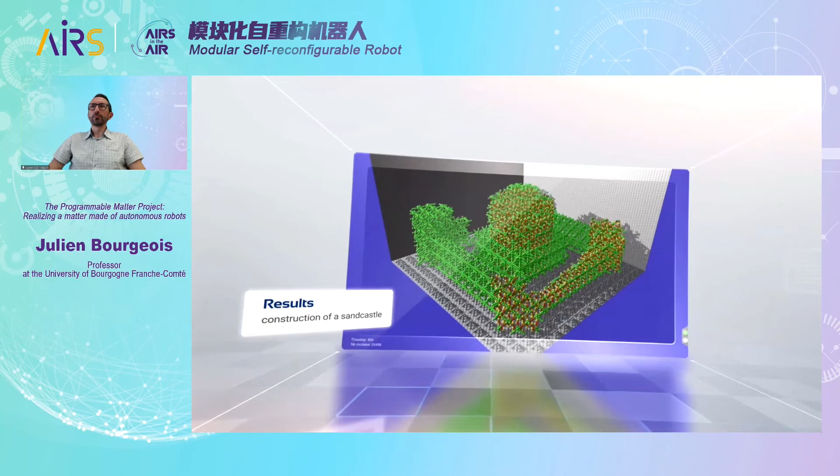VisibleSim has been able to simulate up to 32 million robots, which is the highest number of moving robots ever simulated. This sets a new record. VisibleSim can help any researcher develop, test, and debug distributed algorithms for modular robots. It also offers a powerful visualization tool for effectively communicating research results.

First of all, what kind of model are we using? Our robots all execute the same program. They have a unique ID, a processing unit, memory. They can only communicate with their connected neighbors using messages, and we assume that they are placed in a regular lattice with potentially imprecise clocks, and they can move.

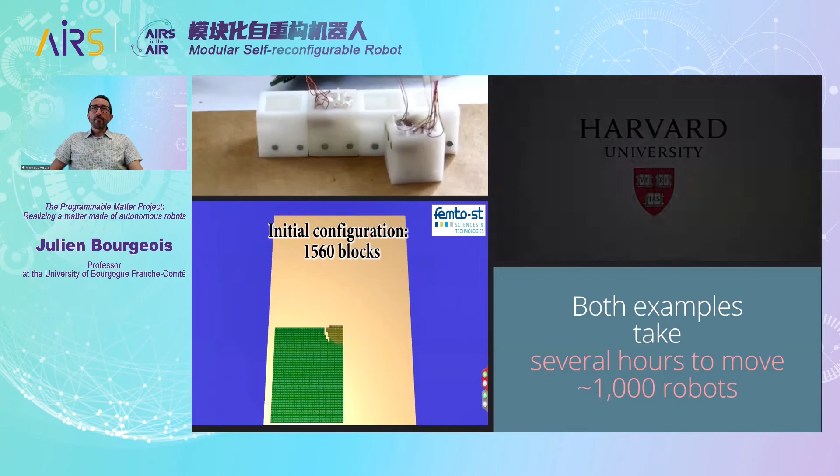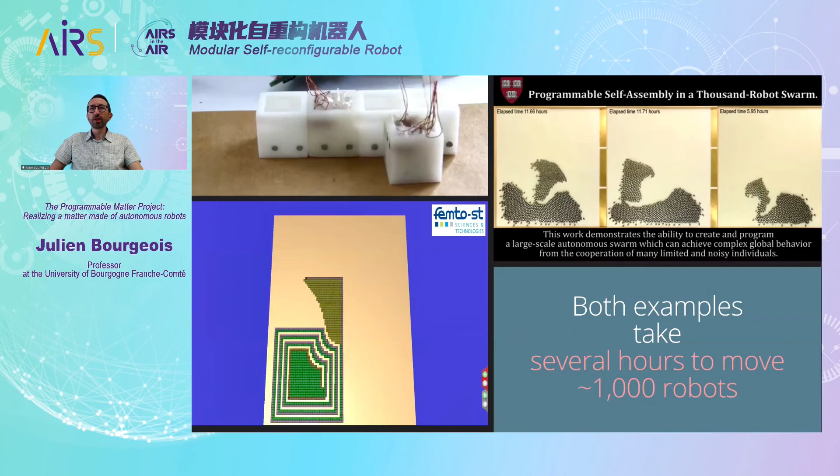Okay, now self-reconfiguration. The hard thing about self-reconfiguration is that the configuration space and the branching factor are all exponential, which creates an intractable optimal planning problem. So we try to apply heuristics for coping with this intractability. Our first experiments, and those of other groups, show that it takes lots of time to reconfigure some robots, so we wanted to cut this time, because if it takes lots of time, it's not very applicable.

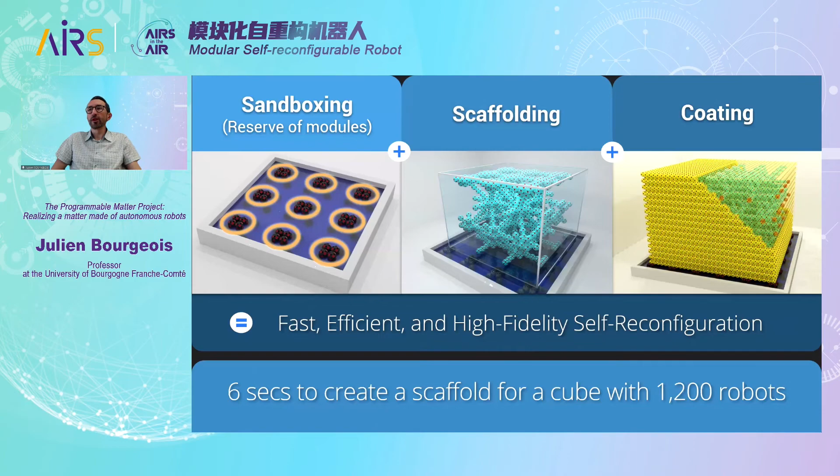So we designed several methods that we call sandboxing—a reserve of modules that is underneath the object—scaffolding, making a scaffold of the object, and then coating, to have the right visual representation of the object. With this, we were able to do simulations with real measurements of movement, creating a scaffold in 6 seconds with more than 1,000 robots.

The algorithm is very simple. I won't detail it any further here, but it's three agents, three roles of agents that the robot can take depending on their situation inside the ensemble.

The construction of the scaffold is made from tiles. The construction of a tile is a process that is well known for the robots, and then they can construct many tiles all linked together, which creates the scaffold. The main issue is to respect the order of construction of the scaffold.

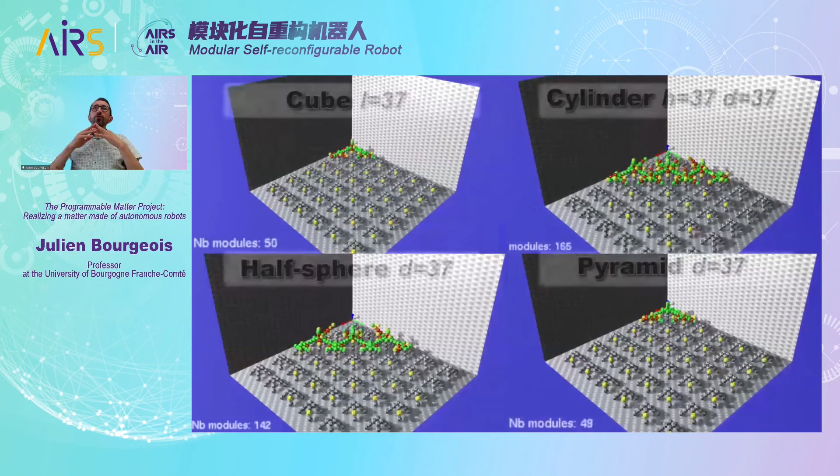So here you can see construction of different kinds of shapes: a simple cube, a cylinder, a half sphere, and a pyramid.

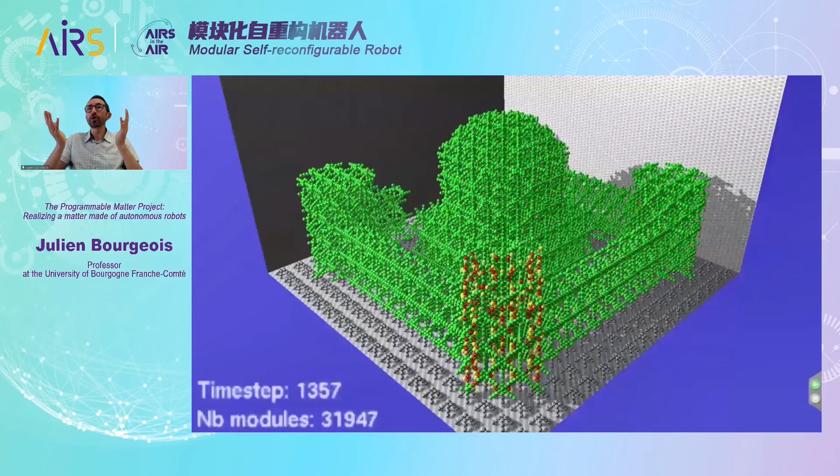And you can see that it can go really fast, because we are using all the potential movement inside the scaffolding. In fact, robots are flowing from the floor to the top almost constantly during the reconfiguration.

This allows us, by measuring the rotation time of our robot, to do some simulation, which shows a reconfiguration time of approximately 6 seconds. It's a lower bound—it will probably take much more time than that—but it gives us an estimate of the total time for reconfiguration, in minutes rather than hours.

We have also done some mechanical modeling, so the robots are able to assess if the link between them will break. You can see that, either in simulation or in real robots, it's working. And they can also detect an instability—if you add one robot at some point, they will just fall down.

Now another interesting part of the work is that we have two artists who have worked for two years producing some artworks using the Blinky blocks.

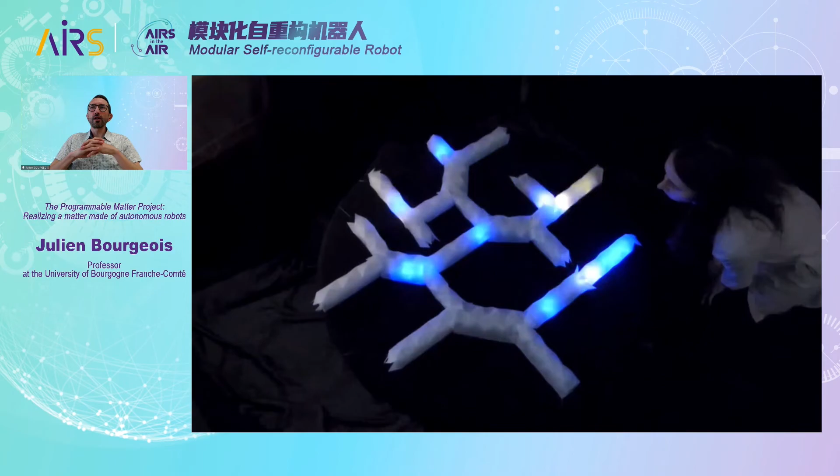And the complexity of what we have built has gone farther and farther. We start with 100 blocks. Then here, several hundred blocks. Then more than 400.

So we displayed this artwork in Paris, Grenoble, in different museums, and we had now 40,000 blocks. This was the biggest experiment, using all the blocks that we have, and we applied and received a Guinness World Record for this shape.

So to finish, what next? We work on the moving actuator and the power transfer as well. As Auke has said, it's a really difficult problem. We are still working on VisibleSim and on distributed algorithms for self-reconfiguration.